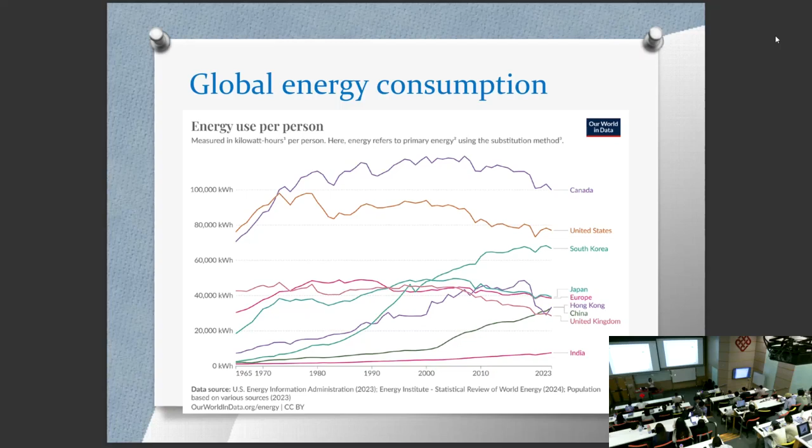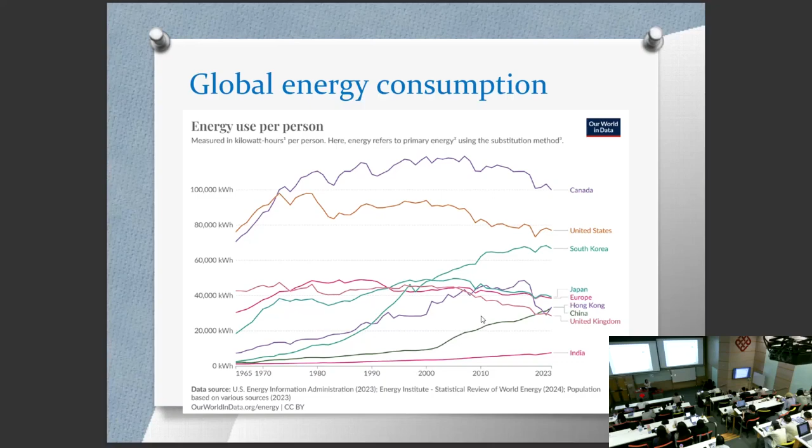And for developed countries, the energy use is dropping, like Canada and the United States. So although still a very high value, the trend is dropping. But for China and India, they are rising, because we have better living standards. Living standards in China are getting better and better, and therefore, with industrialization and urbanization, we are consuming more and more energy.

So global energy consumption is generally a function of three factors. First of all, number of consumers, like the population. The energy consumption in a country or in a region will first of all depend on the population. How many users, how many consumers are there?

And next would be the demand of services. So how much do we need from the energy? And it is dependent on many factors. For example, the economy, the economic growth. So if the living standard is higher and if our salary is higher, then probably we will also consume more energy. I remember back then when I was small, maybe in primary school.

So after school in the summer, maybe it's very hot and I want to switch on the air conditioner. And my mother would ask me to check the weather report, to check the temperature. So if it is higher than 30 degrees C, then I am allowed to switch on the air conditioner. But now, when I go back home, my sons have already switched on the air conditioner for the whole day, for the living room and also for the bedroom. So it's all about the living standard. It's different from decades ago.

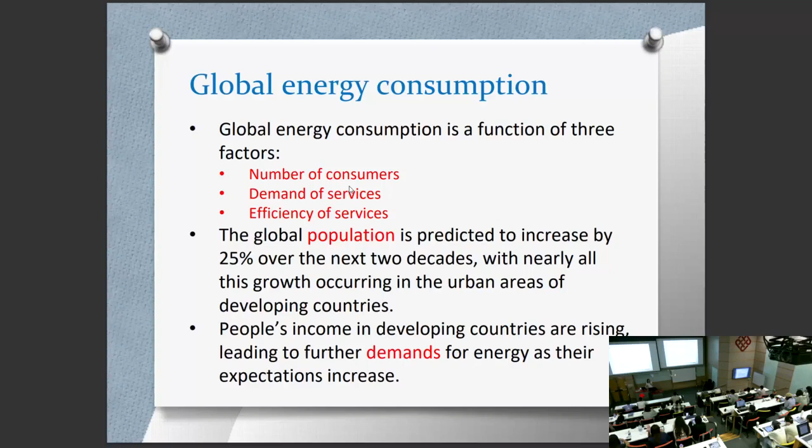And then around 110 years ago, we had the fluorescent tube. We didn't have LED general lighting yet. And the fluorescent tube is much more efficient than the incandescent. So once we had this new product in the market, people were very happy. They could save a lot on the electricity bill. But at the same time, if they could afford that amount of money, then they would install a lot of fluorescent tubes in the ceiling.

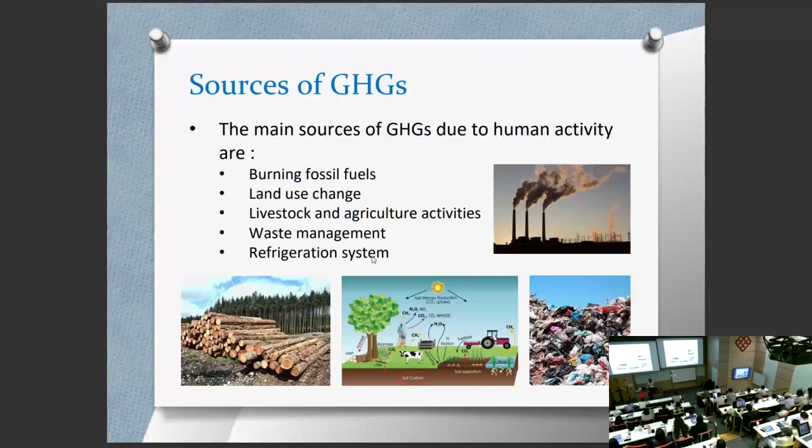And refrigeration systems. In the refrigeration system we use refrigerant, and most refrigerants are greenhouse gases. If these refrigerants leak to the atmosphere, they will contribute to global warming. So these are the greenhouse gases that we mentioned last time: carbon dioxide, nitrous oxide, and not to confuse nitrous oxide with nitrogen dioxide. Nitrous oxide is N2O, nitrogen dioxide is NO2, so they are different. Here we mean nitrous oxide, N2O.

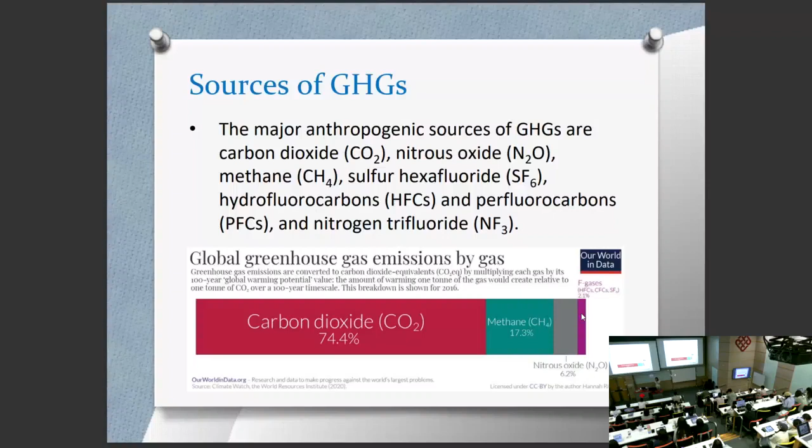And methane, SF6, hydrofluorocarbons, perfluorocarbons, which are commonly used for refrigeration, and NF3. These are the common greenhouse gases. For the radiation effect of all the common greenhouse gases, 74.4% is due to carbon dioxide, then methane, then nitrous oxide and other gases, so hydrofluoro- or perfluorocarbons would be here. Because carbon dioxide is still the predominant greenhouse gas in the atmosphere, we use the term carbon footprint.

The global carbon dioxide emissions is like this. So before the Industrial Revolution it is very, very low. But after that, we are consuming more and more and more. Just in a little bit more than 150 years, how many times? It used to be around just zero, but now 35 billion tons of carbon dioxide. So it's quite scary.

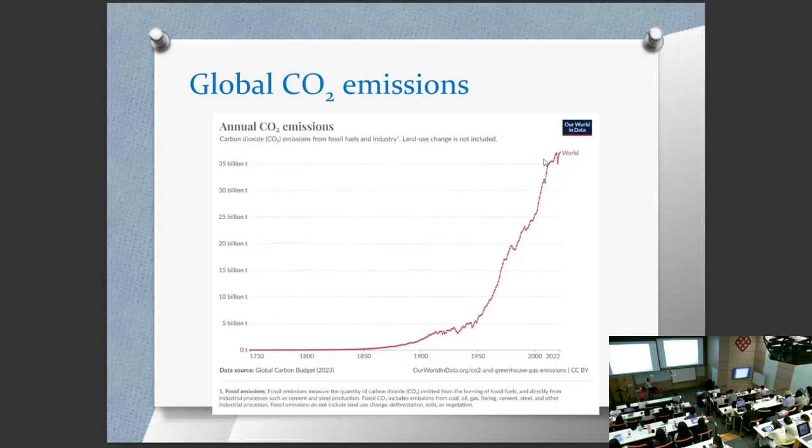Another factor is that China is what we call the world factory or the global factory, right? So many products are actually made in China. It means that we are making a lot of products here in China and export the products to other countries. And these products will be consumed in other countries, maybe in the US.

So it's like they are transferring those carbon emissions to China, because China is the factory. We produce a lot of products and therefore high carbon dioxide emissions. But actually these products are not consumed here in China, but elsewhere. So this factor also affects the carbon dioxide emissions and leads to the high emissions rate in China.

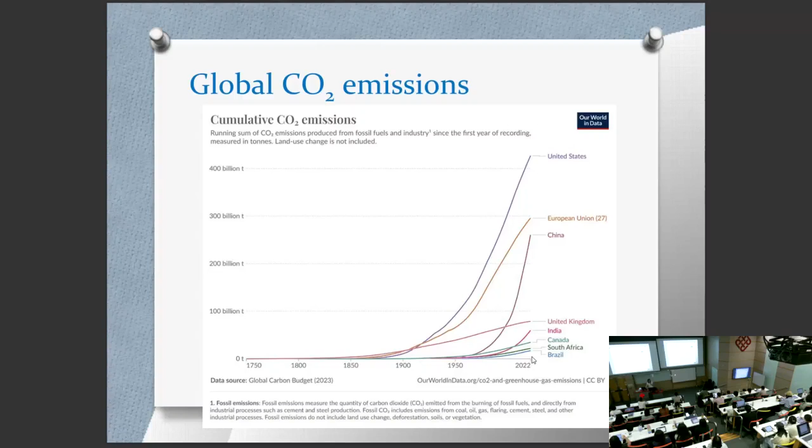And for China here, maybe some years later we would be catching up with the United States, which is not very good. That's why many countries, like the United Nations, are asking China to peak the carbon dioxide emissions in the coming years. It means they want China to reduce or start to stabilize their carbon dioxide emissions. And other countries, Canada, Brazil, India, these are developing countries, so their emissions are also getting higher and higher.

This is the global greenhouse gas emissions by sector, different types of industry. The largest one should be this one, manufacture and construction. So manufacture of products, any kind of products, and building. Transport, the consumption of electricity and maybe gas in residential buildings and commercial buildings, and agriculture, change of land use, waste, industrial process, and so on.

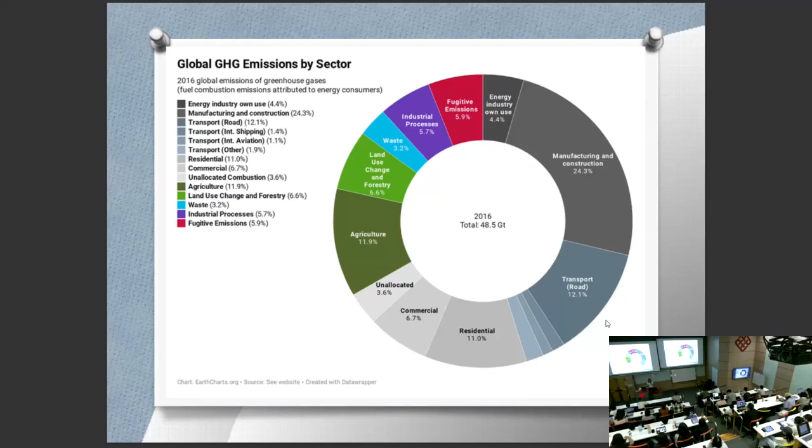So buildings use 30 to 40% of the global energy and contribute to around 1/3 of the global carbon dioxide emissions. So in total, in the whole world, the buildings, including the process of construction, the materials consumed in the construction process, the energy consumed in the construction process, and also during the operating stage, consumption by the air conditioning, the lighting, the lift, the escalator, all kinds of building services systems. So it is responsible for 1/3 of the global carbon dioxide emissions.

So you can see buildings are so much related with the carbon dioxide and other greenhouse gas emissions, and they are affecting one another. Our building industry is affecting the carbon emissions, and the degree of carbon emissions and also the carbon policy will also affect this industry, which will be explained very soon. So reducing energy consumption and reliance on fossil fuel in the building sector is therefore crucial to reduce the global greenhouse gas emissions and to mitigate the impact of climate change. Okay.

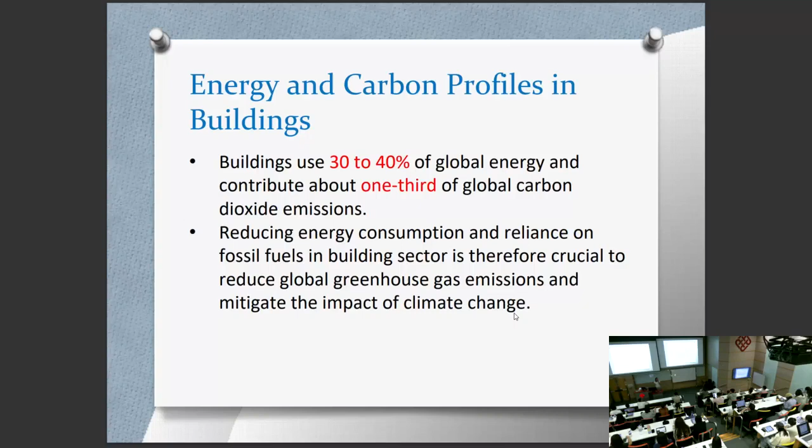So the Hong Kong government is promoting energy efficiency in the recent decades, like in the recent 20 years. And the EMSD also issues the energy efficiency label, like for the fridge, for the air conditioning, and so on. So all these would be with the objective of reducing the electricity consumption and therefore hopefully reducing the carbon dioxide emissions.

So buildings contribute 30% of the world's carbon dioxide emissions. The cost of carbon will impact on running costs, the price of construction materials, and the cost of traveling between buildings. Why is that? So the cost of carbon, one example is the carbon tax. We don't have the carbon tax here in Hong Kong currently, but you can imagine if in the future we need to pay the carbon tax for all kinds of products that we consume, then building would be much more expensive, electricity would be expensive.

And the transportation costs will also be expensive unless we switch to renewable energy for generating electricity. So carbon pricing will affect the building industry and also how we spend the money, our lifestyle. Buildings need to adapt to changing climates in the future, potentially higher temperatures and more extreme weather events. So the rising greenhouse gas emissions cause global warming and climate change.

So I mentioned the EMSD Building Energy Code earlier, right? It states some design criteria for the air conditioning system, and one of the design criteria is the outdoor air temperature. It used to be 33 degrees C, but now it is revised to 35 degrees C because of global warming. So climate change, like global warming, is affecting our building design, and the more and more frequent thunderstorms and heavy rain will also affect the building design.

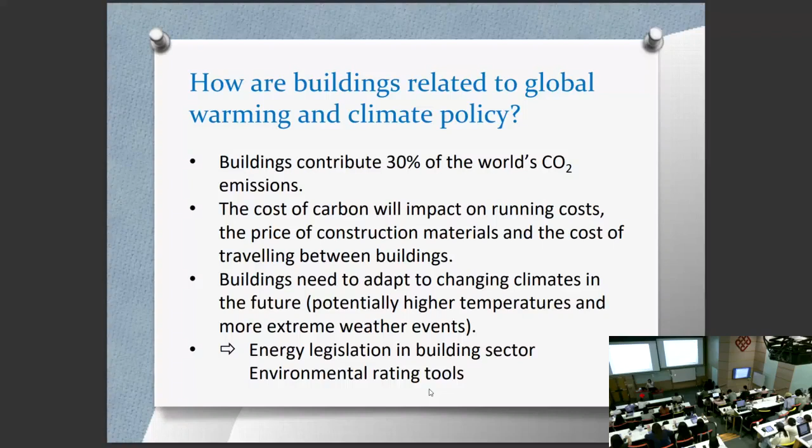Energy legislation in the building sector. Environmental rating tools. So the building legislation is like what I mentioned, the EMSD Building Energy Code, and the environmental rating tools like BEAM Plus, and also LEED, L-E-E-D, which is similar green labeling for buildings. Okay, so now we will talk about life cycle assessment and embodied carbon. Life cycle assessment. So what does it mean by life cycle?

Carbon footprint is typically used to indicate the extent of greenhouse gas emissions resulting from a person's or an organization's activities. So like the carbon footprint of a Hong Kong citizen is around 4.5 tons of carbon dioxide. So this is the carbon footprint for one person.

And we may also use the carbon footprint to state the carbon dioxide emissions due to an activity, maybe a BBQ by a company, and maybe for one building, for one region. So this is the carbon footprint.

And carbon footprint assessment is the measurement of greenhouse gas emitting processes, their origins, their composition, and amount. So origins would be like we have different greenhouse gas emission sources, maybe due to the leakage of refrigerant, or maybe due to the consumption of electricity. So these are the origins.

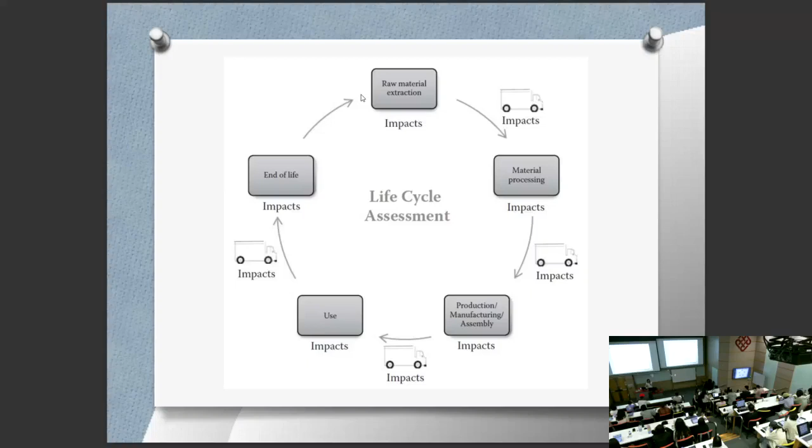So LCA, Life Cycle Assessment, provides a comprehensive approach to understanding the environmental impacts of a product. So maybe a water bottle, maybe a straw, maybe a building. The carbon footprint analysis is only a measure of the climate change impact, global warming implications. And LCA is useful for analyzing many different kinds of environmental impacts, not just global warming. LCA provides an important methodological framework for carbon footprint assessment. So it provides a framework for us to compare.

Usually the life cycle assessment is for comparison. Like maybe we have two designs for a water bottle, and we carried out the life cycle assessment, and we want to find out which design will have lower environmental impacts. So LCA is usually for comparison instead of finding the absolute amount of environmental impacts. Because in the life cycle assessment, we need to make a lot of assumptions, and sometimes there are so many uncertainties. So the absolute answer may not be too meaningful.

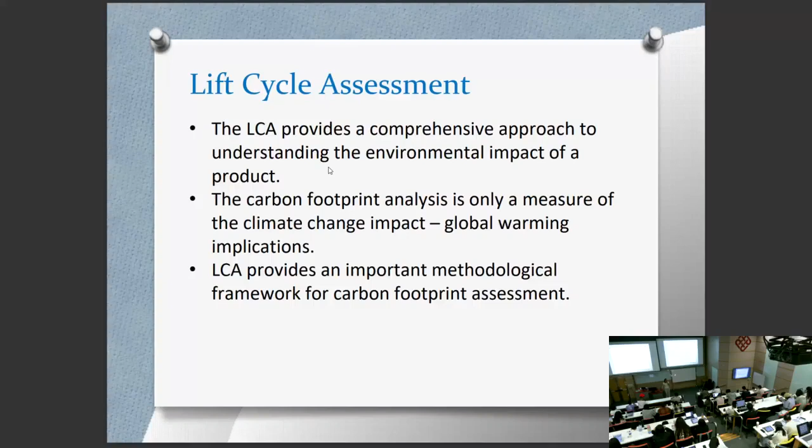But if we make the same assumption and then compare two different products, then we have a conclusion. You see what I mean? So there are too many uncertainties in the LCA such that we need to make assumptions. But for similar designs, similar products, we make the same assumption so that we can do the comparison fairly.

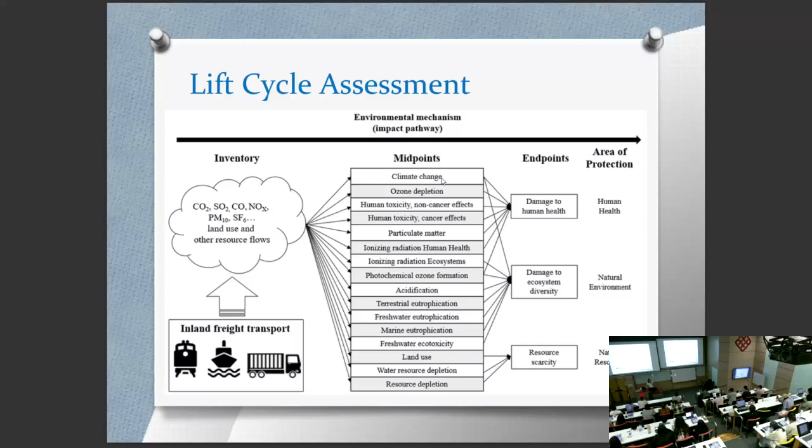And for different stages in the life cycle of a product, like a water bottle, we have different inputs and outputs. And these may lead to climate change, may lead to the release of PM 2.5, polluting the air or affecting human health, or leading to water resource depletion or resource depletion. So for any human activities, for a product, we can use the life cycle assessment to study its environmental impact. And under the category climate change, we use carbon dioxide emissions to assess the global warming effects.

So people inside buildings use energy. Constructing and refurbishing buildings requires energy. During the construction process, we consume energy and we consume resources. And these resources also rely on consuming more energy and resources to produce that kind of product. Commuting to and from the buildings consumes energy, like traveling. And not just the construction of the building on day one, but also including the refurbishing and renovation.

So you can think of maybe you move to a new house. Probably you want to do some refurbishment. Maybe do some painting, and then buy new furniture, new curtains. So this kind of refurbishment and renovation will also consume energy and contribute to carbon dioxide emissions. So construction, refurbishment, renovation, and travel. All these are related to buildings. And these three categories also contribute to greenhouse gas emissions.

And therefore, we have three kinds of carbon footprint generally. We have operating carbon, embodied carbon, and transport carbon. So the three added together, the overall, would be the whole carbon footprint of a building. So first of all, operating carbon. What is the operating carbon?

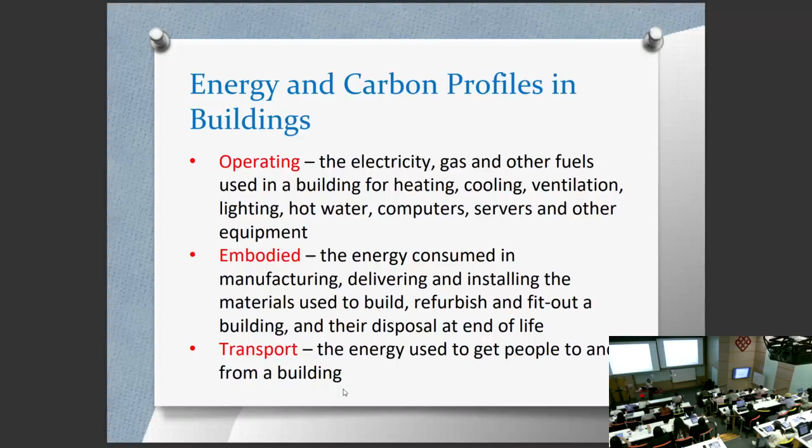So if it is about electricity consumption, then the fuel mix of the electricity generation will highly affect how much carbon will be produced. So whether you are using renewable energy, nuclear power, or burning fossil fuel will affect very much the operating carbon. Okay, just like what I mentioned earlier.

So I am buying electricity from CLP, and CLP imports electricity from Daya Bay. So probably their emissions will be lower. Okay, so the fuel mix of the electricity will affect very much the operating carbon.

Okay, and there will also be distribution loss. Every conductor will have resistance, so it means that along the transmission cable, there will be certain power loss. And this power loss should also contribute to the operating carbon. Okay?

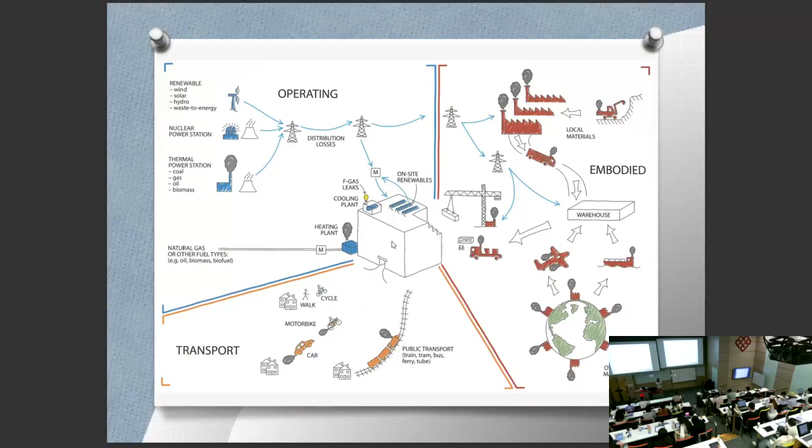So before the break, we have learned different kinds of carbon related to a building: the embodied carbon, the operating carbon, and the transport carbon. And for today, we will focus on the embodied carbon. Energy and carbon profiles in building.

So for any kind of carbon, the unit would be carbon dioxide equivalent. If you remember, last week in our first lecture, we explained the concept of global warming potential. There are different kinds of greenhouse gases, carbon dioxide, methane, nitrous oxide, and they have different radiative forcing, meaning their heat trapping abilities are different. So in order to compare them fairly, we convert the quantity of methane or nitrous oxide into carbon dioxide equivalent by using the global warming potential.

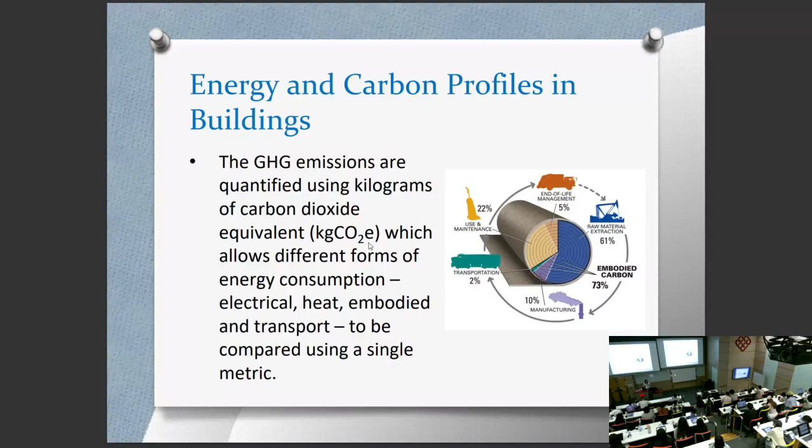So greenhouse gas emissions are quantified using kilograms or tons of carbon dioxide equivalent, which allows different forms of energy consumption, electrical, heat, embodied and transport, to be compared using a single metric. So for carbon footprint, we use the unit ton or kg CO2e. That's why you see the E here. The E represents equivalent, so it has already incorporated the global warming potential.

Every material or product used in a building has embodied carbon, unless it's something from nature. But if it is a man-made product, then it will have certain embodied carbon. Embodied carbon of a building material refers to the greenhouse gas emissions arising from its manufacturing, transportation, storage, installation, maintenance, and disposal at the end of life. So every stage in the life cycle of that product. For embodied carbon, we use the life cycle concept to do the assessment.

So from material extraction, processing, manufacturing, transportation to the factory and then to the warehouse, installation, maintenance, maybe every 10 years we need maintenance, and finally, when it is not usable, we dispose of it. So how you dispose of it, whether you throw it in the landfill or you recycle, all these will affect the embodied carbon.

And it involves complex computation in the large supply chain involved in construction, fit-out, maintenance, refurbishment, and eventual demolition of the buildings. So, like I am making something, maybe handcraft, using some fabric to make a dress, for example, and I want to estimate the carbon footprint of making that dress. But I just bought the fabric from Sham Shui Po. So how can I get the data?

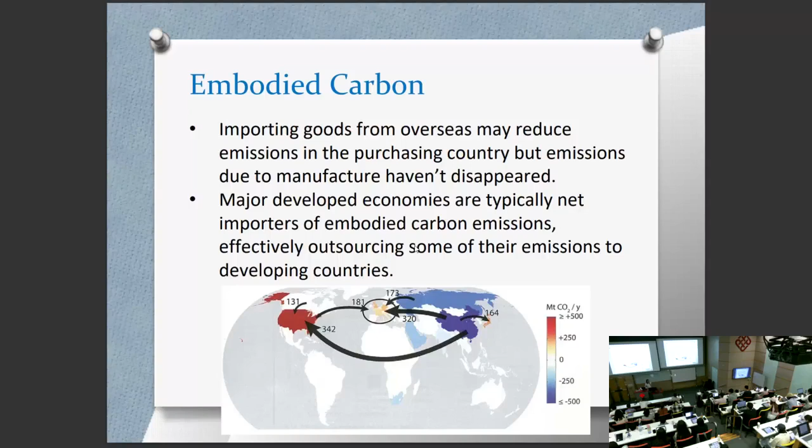Major developed economies are typically net importers of embodied carbon emissions. If the product is made in China, the carbon emissions are actually released in China, but they import the product, so it means they import the carbon emissions also. So these are different, important concepts.

When we describe the embodied carbon, the boundaries are very important. The boundaries mean that in the whole life cycle, we may estimate the embodied carbon from cradle all the way up to when the product is manufactured and sent to the warehouse, or from cradle to the site, that is, all the way from material extraction, manufacturing, transportation to the warehouse, and then to the construction site, or the whole life cycle, from cradle to grave.

So different boundaries are necessary, because if I am the manufacturer of the water bottle, or maybe some furniture, or maybe some brick for construction, I cannot control the construction process, right? I can control only up to when the bricks are sent to the warehouse or some distribution center.

But if you are the building designer, you want to compare the building design across several options, and you may have different construction designs, different approaches, so that will affect how you utilize the brick and the energy consumption during the process. So then the embodied carbon may be up to the construction site, or maybe even cradle to grave, the whole life cycle. So when we do the embodied carbon assessment, we need to set the boundary, and there are several boundaries that we may use: cradle to gate, cradle to site, and cradle to grave.

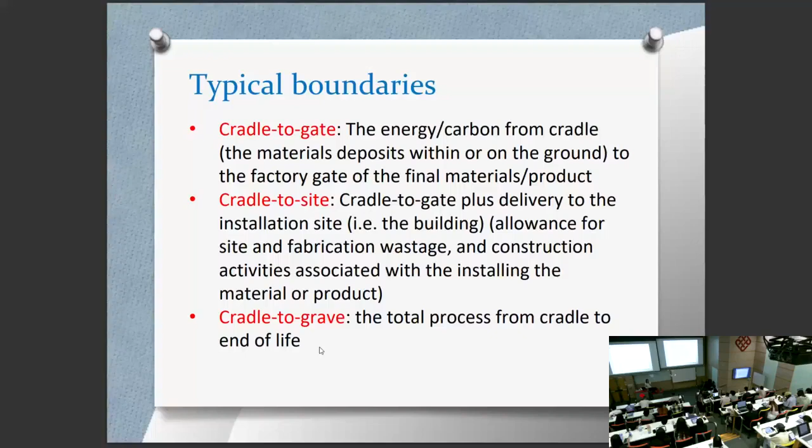And finally, cradle to grave is everything associated in the life cycle of that product, from cradle to end of life. So here we have cradle to grave. From cradle, we extract the raw materials, then some industrial process, some manufacturing process, transportation to the warehouse, which is the distribution center.

So from cradle up to here, it is cradle to gate. If I am the manufacturer, probably I will have the capacity to estimate the cradle to gate embodied carbon, right? And when you buy the product from the warehouse and use a truck to transport the product to the construction site, you will order some more to allow some wastage, and in the process you may have to consume certain electricity. So these processes will also result in carbon emissions.

So up to this point, after finishing the construction process utilizing the product, it is cradle to site embodied carbon. And the product, like this brick wall, will be in operation. During this phase, there should not be any embodied carbon because it's the operation stage, unless this product needs some renovation or refurbishment. Maybe every now and then you may need to renovate or refurbish the brick wall. Then it will also include some embodied carbon during the operating phase.

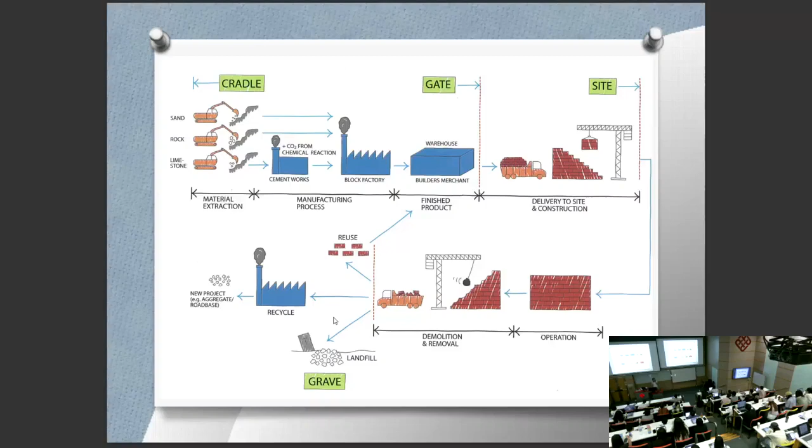And at the end of the day, when that product is thrown away, demolished, then certain carbon will also be emitted. And it depends on the disposal process, whether you throw it into the landfill or recycle the product. So up to this point would be cradle to grave. All right. So 3 different boundaries for the assessment of embodied carbon.

So calculating the embodied carbon of initial construction. Initial construction is the construction of that building on day 1, not the renovation every 10 years, not the refurbishment of the interior. So an embodied carbon assessment is basically a bill of quantities using carbon rates instead of cost rates. For a building project, like in the tender process, you have a long table summarizing all the materials to be consumed. And instead of money, here we use the carbon emissions as the unit rate, so as to estimate the initial embodied carbon.

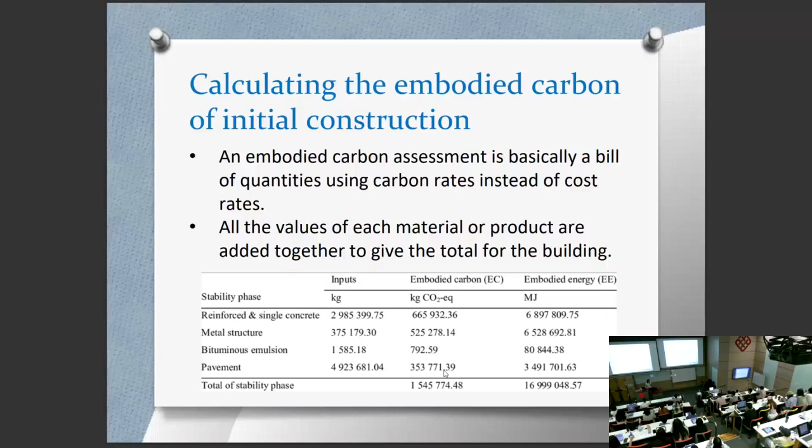So all the values of each material or product are added together to give the total for the building. And once again, we will be using the carbon equivalent as the unit, kg or ton of carbon equivalent. So here, maybe reinforced concrete, metal, and some others. You have the weight, and you have the emission factors, maybe certain carbon equivalent per kg. Then you can calculate the embodied carbon of that material, and we add them together to find the total. Of course, this is a simplified table.

So if this emission factor is based on the manufacturer data, then probably this is the cradle to gate embodied carbon, right? Up to the warehouse. This is what the manufacturer can control. And if you add to the cradle to gate embodied carbon the waste, allowing some wastage in the material, the transportation from the warehouse to the construction site, and also the site activities, then you have the cradle to site embodied carbon. All right?

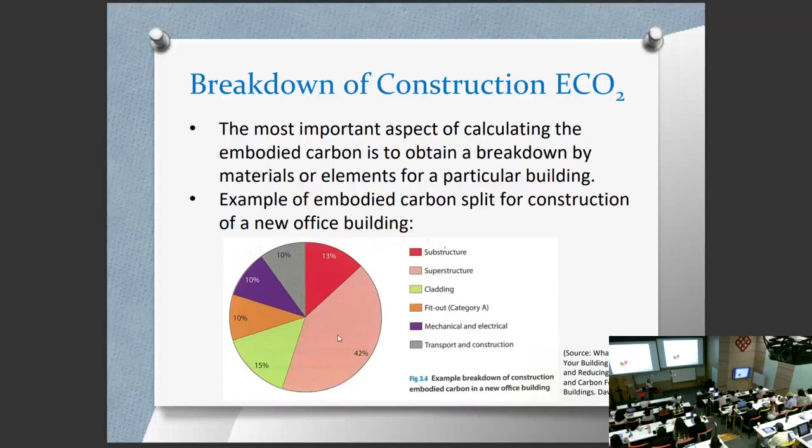Why is that? Because in order to manufacture timber, you need to grow a tree, right? And during the years of growing, the tree will absorb carbon dioxide. So it acts like a sink of carbon dioxide. So for the life cycle of the product timber, some duration of the life cycle will absorb carbon dioxide, resulting in a negative embodied carbon.

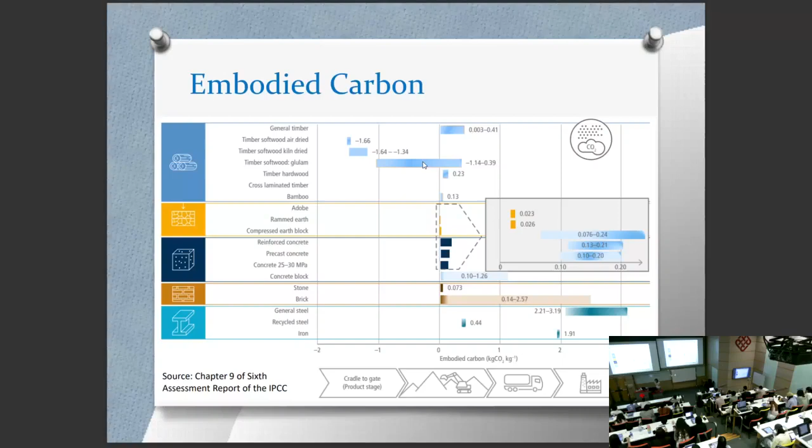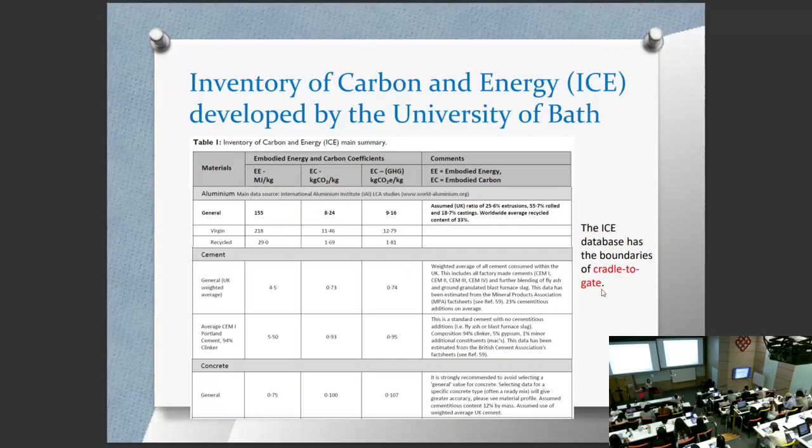It should be noted that the material or products with the lowest cradle to gate embodied carbon may not necessarily have the lowest greenhouse gas emissions over the life of the building. This is because materials and products have different properties, durability and recyclability. For example, maybe you want to compare a concrete construction and a steel construction. Steel is a kind of metal, so if you refer to the previous table, you will find that the embodied carbon per kg of steel would be larger than that of concrete. Very probable. But they have different density, right?

So if you are building a house with a metal or steel structure, probably you will use less in terms of weight than concrete. So you cannot just compare the emission factor. And also for steel, when you demolish the building, you can maybe reuse or recycle the steel. So it depends on how you utilize the material and the disposal, how you treat the waste. And durability, whether some materials are more durable or need frequent maintenance. All these will affect the embodied carbon over the whole lifetime of the material.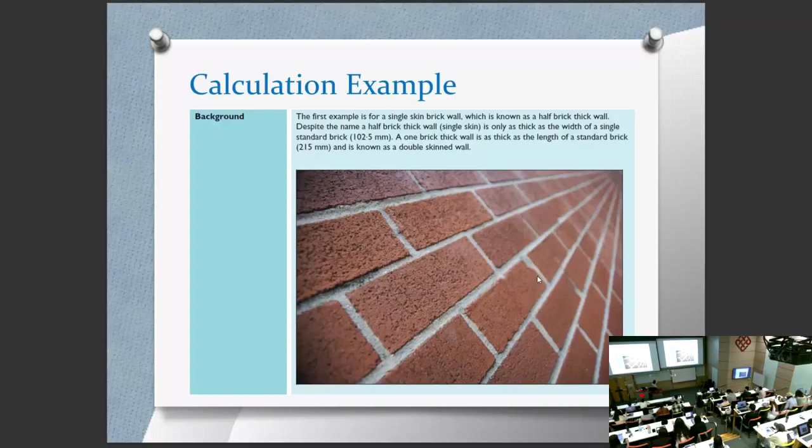Here is an example, and it involves some calculation. So, a single skin brick wall, blah, blah, blah. It's just some explanation. It's just that we are building a wall, like this. This is the brick, and we are building the wall simply like this. And single skin or double skin is because a double skin wall would be something like, okay, very bad drawing.

We can build a brick wall like this. You can see that for this brick wall, the thickness will be larger than this. This one is only a single layer, right? This one has larger thickness, so it is called the double skin wall, and this one is the single skin brick wall.

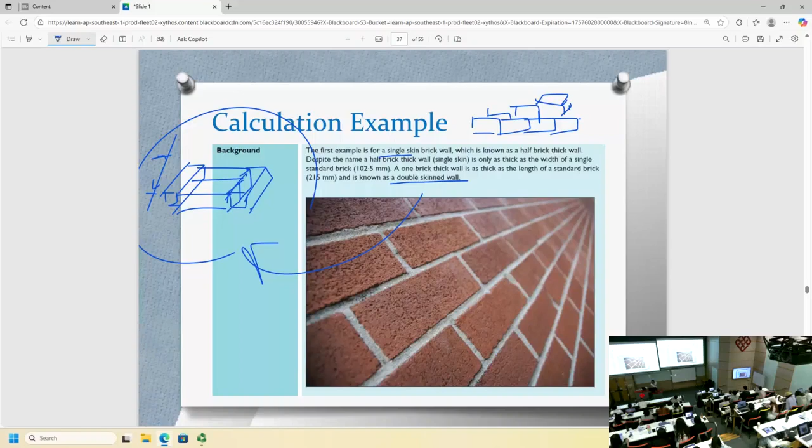Nothing special. Then we want to calculate the cradle to site embodied carbon of a single brick thick wall per square meter. So here we have 1 meter by 1 meter of brick wall, single brick thickness.

Okay, so something like this. And it is given the dimensions of the brick is 215 mm in length and the width 102.5. So if the brick is like this, the length is 215 mm, the width is 102.5, and the height is 65 mm. So this is the UK standard brick.

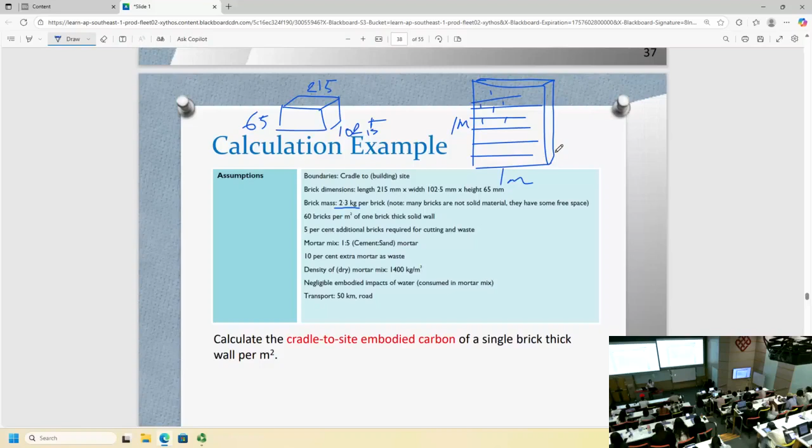And we have the mass. Okay, the weight of one brick is 2.3 kg. And in order to build a 1 meter by 1 meter brick wall, we need 60 number of bricks. Then we can construct this brick wall. And apart from brick, we also need to use mortar. So for the mortar, we have the density. The density of the mortar is given to be 1,400 kg per cubic meter.

And remember, to calculate the cradle to site embodied carbon, we need to include the wastage. We need to allow some bricks and mortar being wasted. And the wastage factor is 5% for the brick and 10% for the mortar. Apart from the waste, we also need to include the transportation, the carbon emissions due to transportation from the warehouse to the construction site. So include the transport.

So we have the data for us to calculate the quantity of bricks that we need and the quantities of the mortar that we need. How about the emission factor? So we refer to the next slide. The emission factors for embodied carbon would be 0.55 kg carbon dioxide equivalent for each number of brick. And how many do we need? We need 60 number of brick, but we need to allow 5% of wastage. So we need to multiply 1.05 in order to include the wastage factor. And multiply by 0.55 would be the part of the carbon emissions due to the manufacturing of brick.

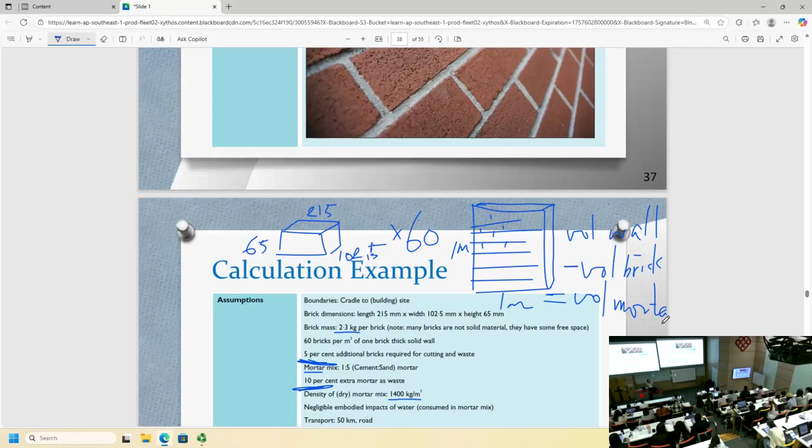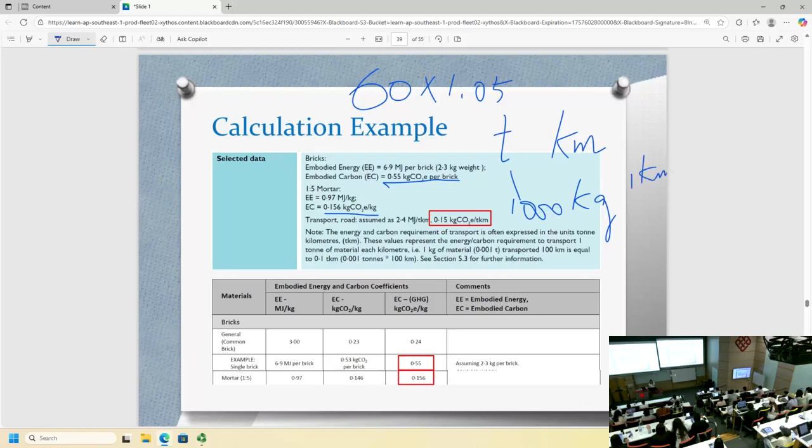So we have the volume and we have the density. So we can calculate the weight of the mortar and multiply by the wastage factor and the emission factor. Then we have the carbon emissions. And finally, the last factor is due to the transport. The transport emission factor is 0.15 kg carbon dioxide equivalent per ton km. So it means that for every 1 ton, which equals 1,000 kg, of goods to be transported, and for every 1 km of transportation distance, the emissions will be 0.15 kg of carbon dioxide equivalent.

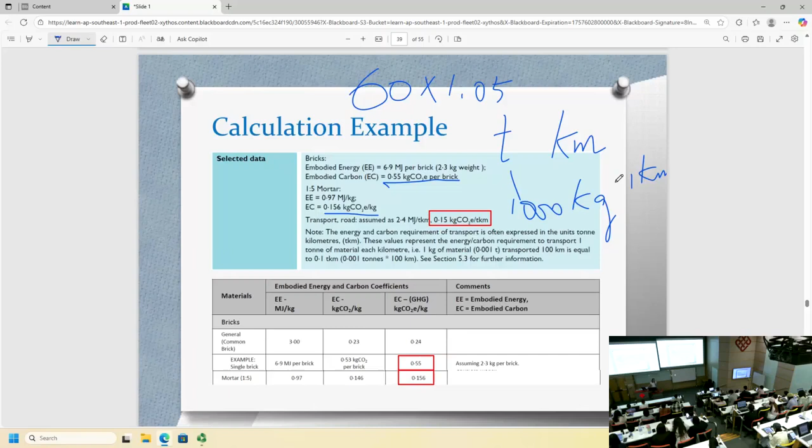And this is only a general value. The emissions will depend on the type of truck, the type of fuel, whether you use diesel oil or biodiesel oil. So all these will affect the emission factor for transport. So in order to find out the transport carbon, we need to know the total weight of all the bricks, including the wastage factor, and the total amount of mortar that we need. And the transportation distance is given, 50 km. 50 km is the traveling distance.

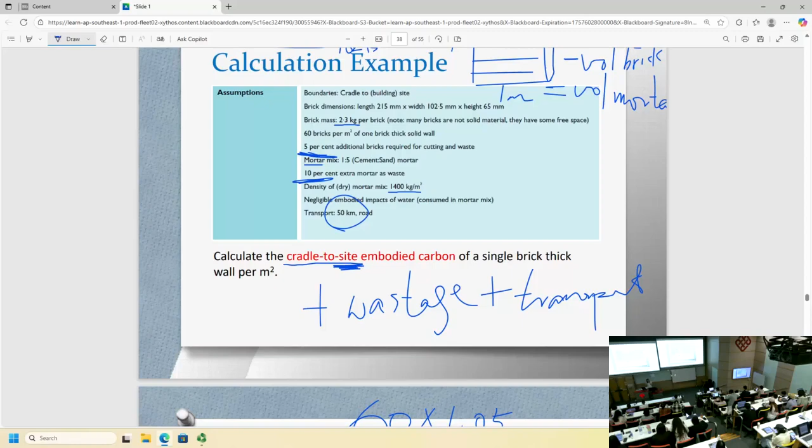So in the calculations, here we are calculating the area. So if this is the 1 meter by 1 meter, and we have the brick covering 1 meter by 1 meter. So we can calculate the area occupied by the brick. So 1 meter by 1 meter minus the area occupied by the brick would be the area occupied by the mortar. So 1 meter by 1 meter, and the length and the height of one brick, and within 1 meter by 1 meter area, we need 60 number of bricks.

So this is the area, multiplied by the thickness of the wall, then we have the total volume, and the density. So volume multiplied by the density, and we have the weight. So the total weight to be transported would be the weight of the mortar, including the wastage factor, and the weight of one brick, times 60, and the wastage factor. So this is the total weight. So 170 kg would be 0.1704 ton. Okay, so very straightforward calculation.

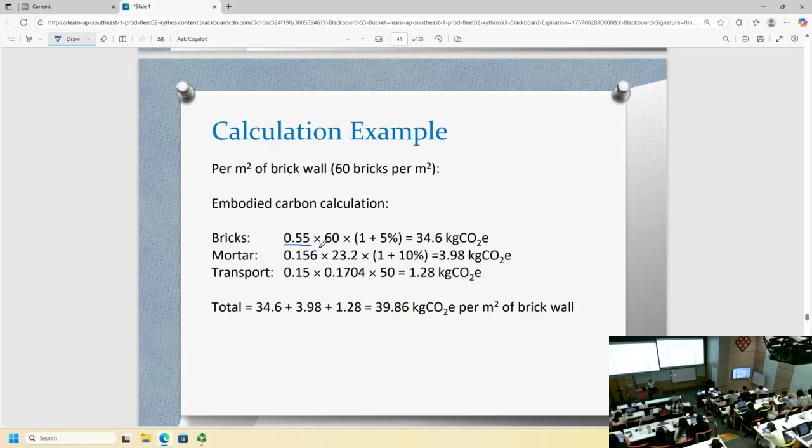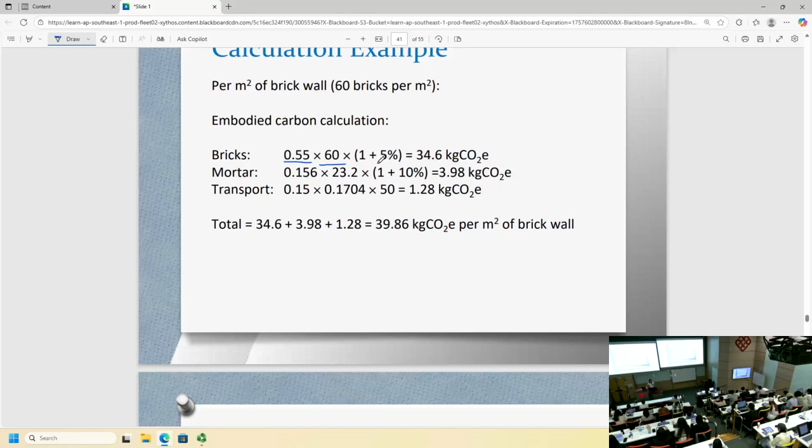And now we can calculate the embodied carbon. So for the brick, we have the emission factors, and we need 60 bricks, and the emission factor is per brick, so 0.55 kg CO2 equivalent per brick. So we only need to multiply by the number of bricks, including the wastage factor. And then also the emission factor, but this time this emission factor is per kg. So we need to calculate the overall weight, which is this, and then multiply by the wastage factor, and we have the carbon emissions.

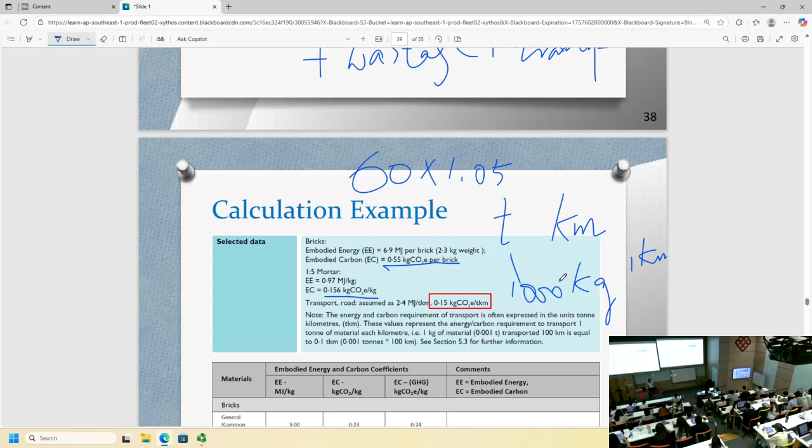And then the transport. This is the emission factor, 0.15 kg carbon dioxide equivalent per ton km. So we need to multiply 0.15 with the total weight, how many tons of goods to be transported, and the total transportation distance. So the total weight is this value. We multiply by the total weight, and the distance is given to be 50 km. And adding all these three together would be the embodied carbon, cradle to gate. All right.

So we know that the calculations of embodied carbon for a building involve a lot of data, some recommendations from the guidelines, some assumptions. According to the book called What Colour is Your Building? Measuring and Reducing Energy and Carbon Footprint of Buildings, which is a research study in the UK, the author has collected the initial construction embodied carbon of different buildings, and it is found that the average is around 700 kg carbon dioxide equivalent per square meter. And this area is the gross internal floor area.

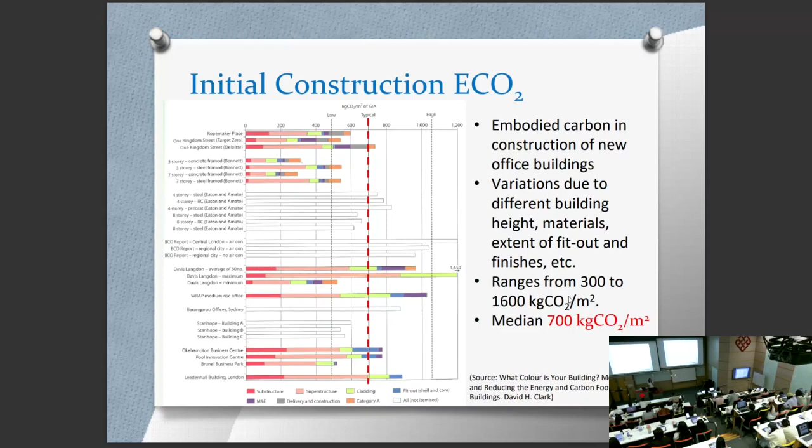And it actually has a large variation. The embodied carbon can range from 300 to 1,600 kg carbon dioxide per square meter of gross internal floor area. And it makes sense, there must be a large variation, depending on the material you use, whether timber or concrete or steel structure, and then the interior refurbishment, and the construction process. All these will affect the initial construction embodied carbon.

While the structure of a typical building may last 50 or 60 years, many components, such as the mechanical and electrical plant and the interior furnishing, will be replaced or refurbished, often more than once within the time frame. Maybe every 20 years we need to replace the air conditioning plant, or refurbish the carpet every 5 years. Refurbishment and fitting out have to be done when a new tenancy starts, especially for commercial buildings like offices or retail shops in shopping centers. If a new tenant moves in, they will probably do the refurbishment and renovation.

So the whole life embodied carbon of a building includes the initial embodied carbon, the embodied carbon due to refurbishment and fitting out, as well as the end-of-life embodied carbon: when you demolish the building, how you treat the waste, dispose in landfill or recycle. So first, the initial embodied carbon, how much carbon is released when you construct the building. Then adding the refurbishment and fit-out carbon, because every few years you may need to refurbish. And finally, adding the end-of-life embodied carbon. These three together are the overall embodied carbon.

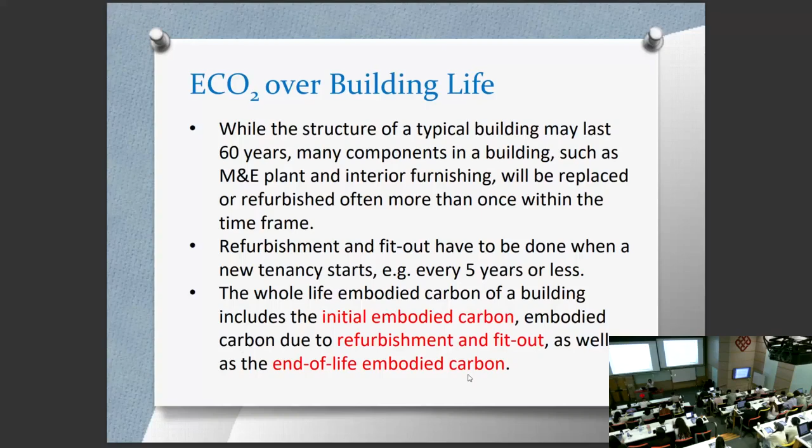Embodied carbon due to tenant fit out. Based on the same reference book, What Colour is Your Building?, the carbon due to the fit out would be between 100 to 200 kg carbon dioxide equivalent for every square meter of gross internal floor area. If we assume the fitting out happens every 10 years, it could represent a significant portion of the whole life embodied carbon of a typical office building.

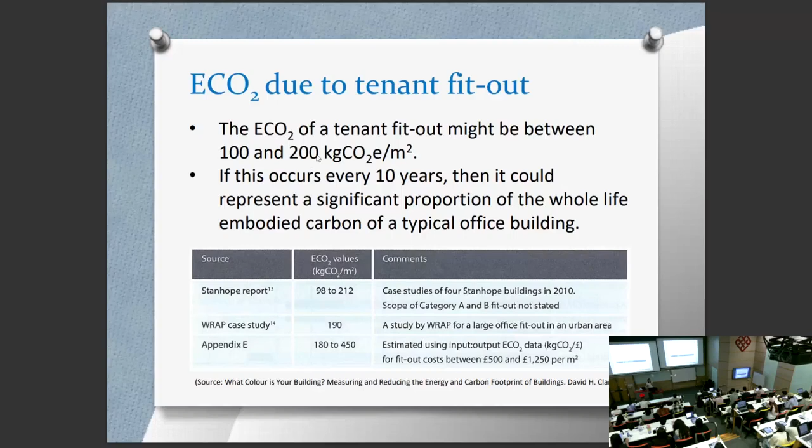Remember, according to the same book, the average initial embodied carbon is around 700, and for the fit out, 100 to 200 every time. In the whole life cycle, which may last 50 or 60 years, we may need to do at least 5 fit-outs. Then it could be even more than the initial carbon.

Okay, end of life embodied carbon. So what happens to the materials at the end of life is a complex issue, because the building is still there. I don't know what would happen 10 years, 20 years later. So various studies based on current demolition practices suggest that site activities and waste transportation and disposal account for between 3% to 5% of the total embodied carbon. This is only based on some previous projects of demolishing buildings. So it will be around 3% to 5% of the total embodied carbon.

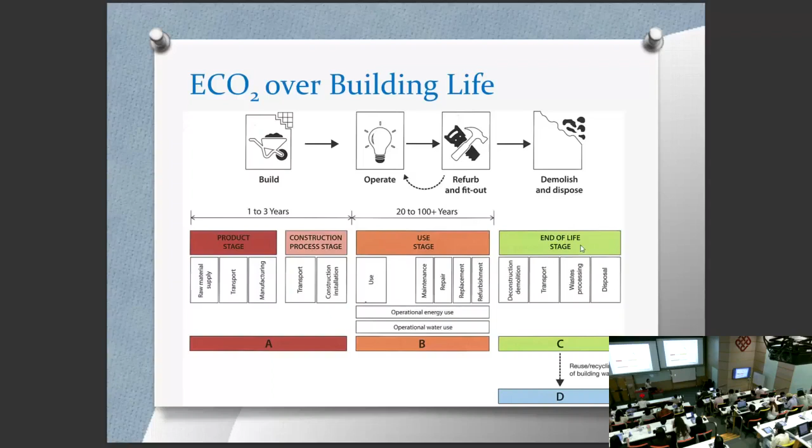So this table lists out different kinds of embodied carbon. First of all is the initial embodied carbon. Next, in the usage phase, you have the refurbishment and the fitting out, and these are the fit-out and refurbishment embodied carbon. And at the end of the lifetime of the building, you have to demolish the building, spend some energy, transport the waste, maybe to the landfill, or maybe for recycling. So these are the end of life embodied carbon. Adding up together, you have the total embodied carbon.

So let's try to compare these two. Which building has lower whole life embodied carbon? Steel structure building or timber structure building? Maybe from our intuition, from our first guess, timber structures have negative embodied carbon, right? Then it makes sense that the timber structure building should have a lower whole life embodied carbon. But we also need to consider other factors like durability. A steel structure is probably more durable and needs lower maintenance, so lower maintenance carbon. And when it is disposed at the end of its lifetime, steel can be reused or recycled.

And for a timber structure, yes, it is true that the timber may have a very low embodied carbon. But how about the construction process? Maybe we have to consume more energy, more electricity for construction, and the timber may not be as durable as the steel structure. And at the end of the day, when we throw away the timber, how will you treat it? If you throw the timber to the landfill, when it decomposes, the carbon dioxide will be released. Or you can capture the gas released from the timber, maybe for generating electricity. So all these decisions will affect the whole life embodied carbon. You cannot simply compare these two without further information.

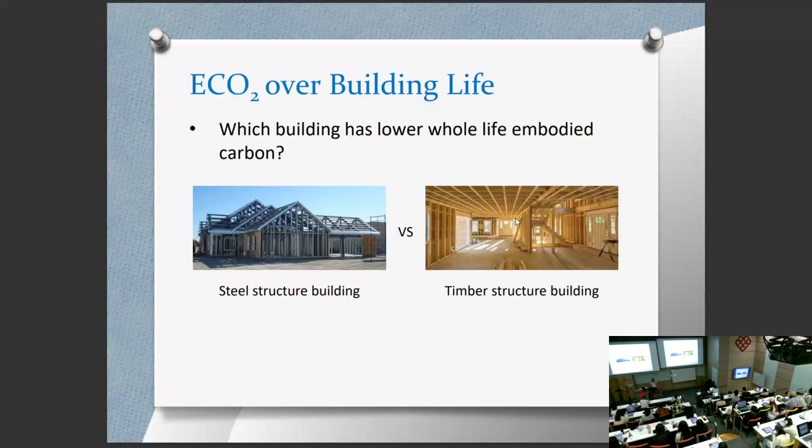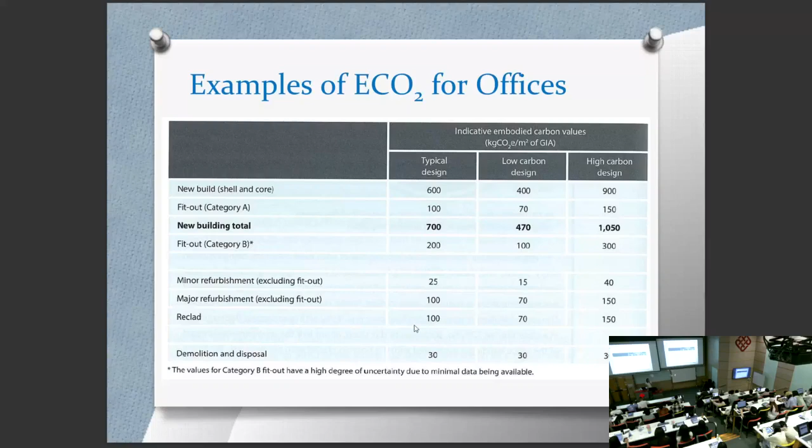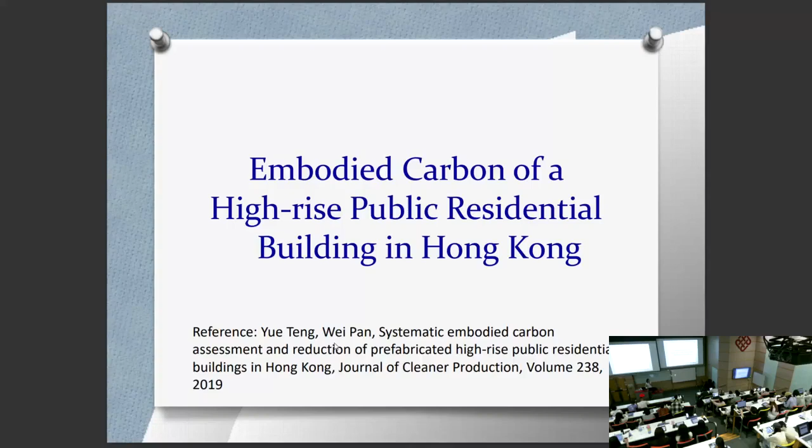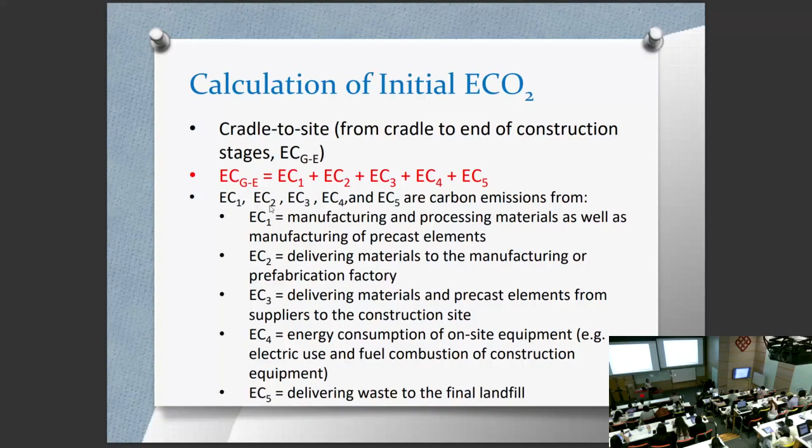is like this. Based on the research project, they calculate the cradle to site embodied carbon, which includes the embodied carbon for manufacturing and processing the material, delivering the precast elements from the prefabrication factory to the construction site, and the energy consumption of on-site equipment, that is, the construction process. And lastly, throwing away the construction waste to the landfill. All these added up give the cradle to site embodied carbon.

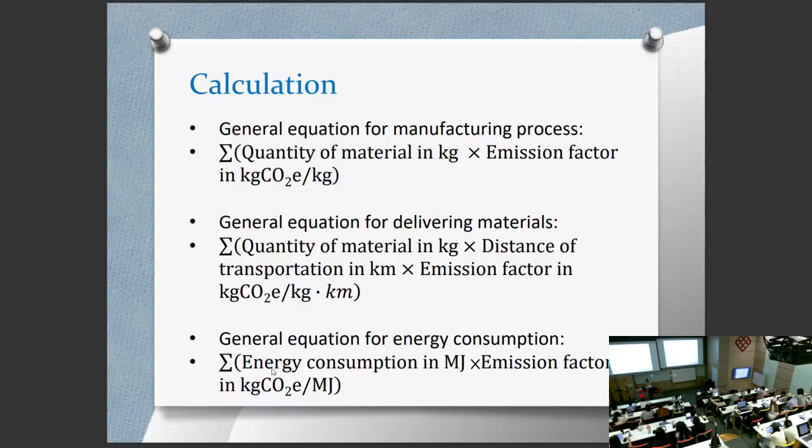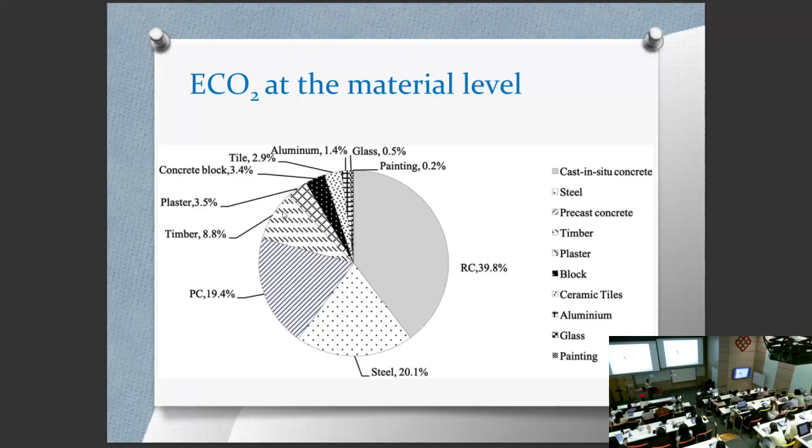And the result: the concrete, on-site concrete, manufacturing and the construction, and the precast concrete, the steel, they already constitute most of the embodied carbon. And next would be the timber, maybe for the cladding of the reinforced concrete, and then plaster, and so on.

Okay, so just some more examples for your reference. We have some examples from the book, which are for UK buildings, and this is another example for buildings in Hong Kong.

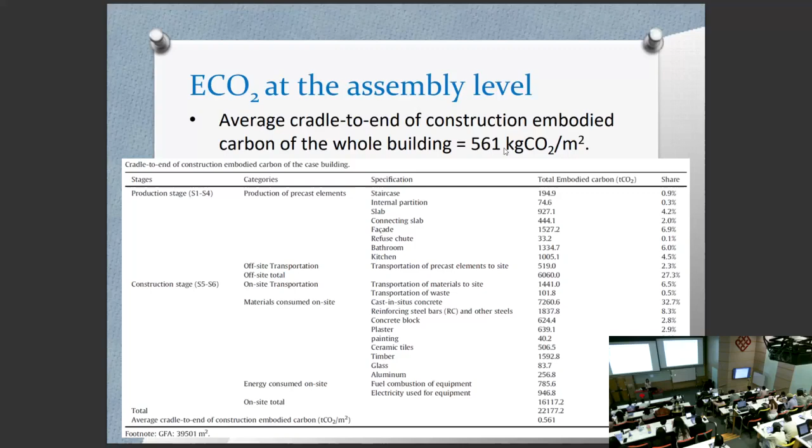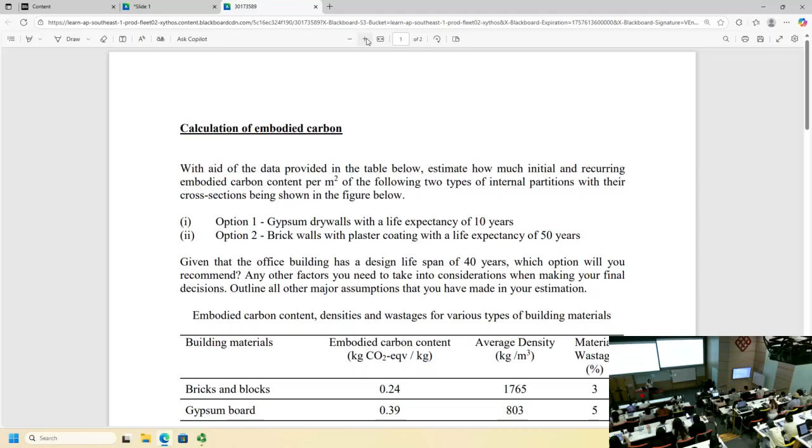Okay, so lastly, I would like to discuss with you the tutorial. I will finish it very quickly. This is something similar to the example that we have studied earlier. With the aid of the data provided in the table below, estimate how much initial and recurring embodied carbon per square meter of the following two types of internal partitions, with their cross-section being shown in the figure.

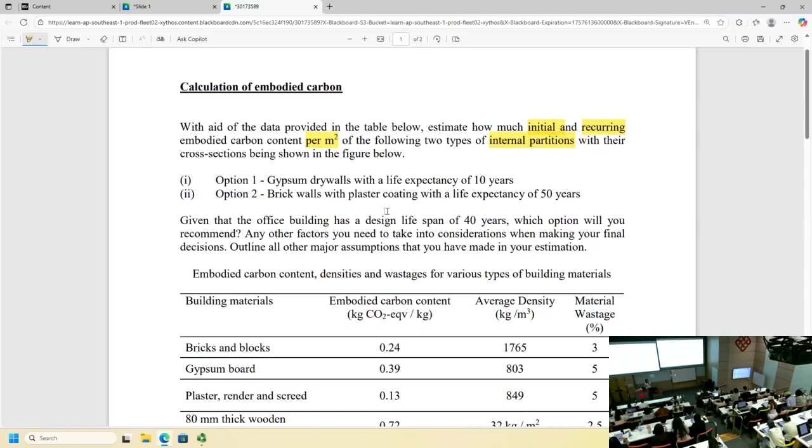So we have two kinds of internal partitions. Either you use gypsum drywall, or the brick wall with plaster coating. The composition of the walls is explained in the figure. Option 1, the gypsum drywalls with a life expectancy of 10 years. So this is a cheap drywall, and it will probably last for 10 years only.

So if you choose this kind of partition wall, you have to replace the drywall every 10 years. And option 2, brick walls with plaster coating, has a life expectancy of 50 years, a much longer time. Given the office building has a design lifespan of 40 years, we assume the lifetime of the building is 40 years.

So if you are using the drywall, you have to replace the drywall 4 times. If you are using the brick wall, you don't need to replace any, because its lifetime is longer than that of the building. So after calculating the embodied carbon, you have to determine which option you will recommend, any other factors you need to take into consideration when making your final decision, and outline all the major assumptions that you have made in your estimation.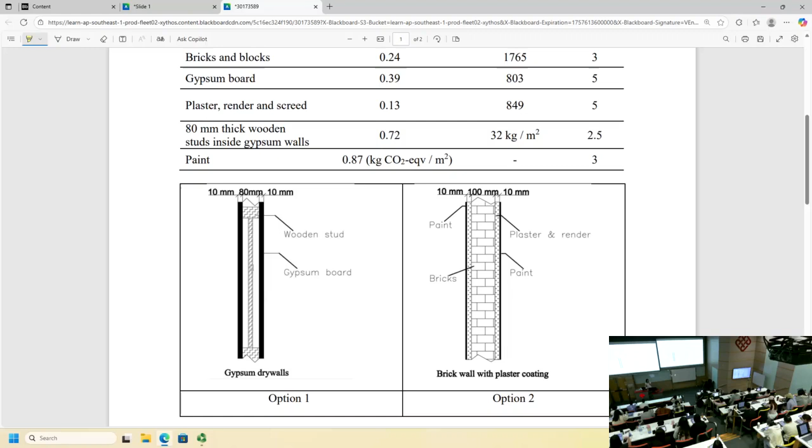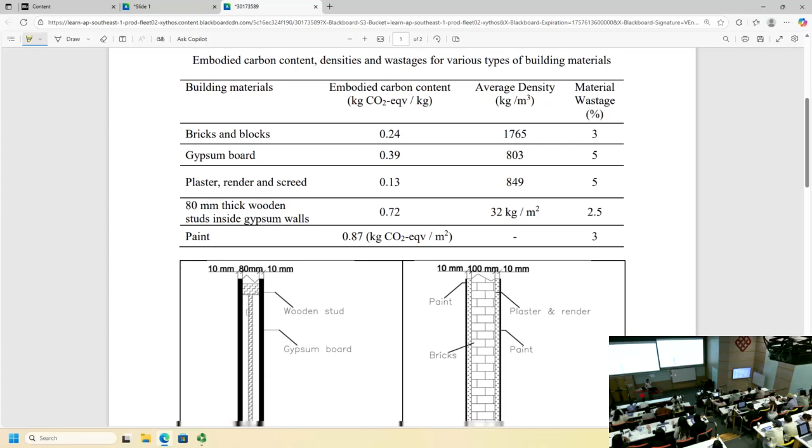And for the gypsum board, also per kg, and you have the density. And the plaster, render, and screed on the brick wall, you have the emission factor and density. And the wooden studs, the structure for installing the drywalls, you are given not really the density, but something like it: 32 kg of wooden studs inside the gypsum board per square meter of wall area.

And on the 2 sides of this brick wall, you also need to apply the paint. And the paint emission factor is per square meter of the wall.

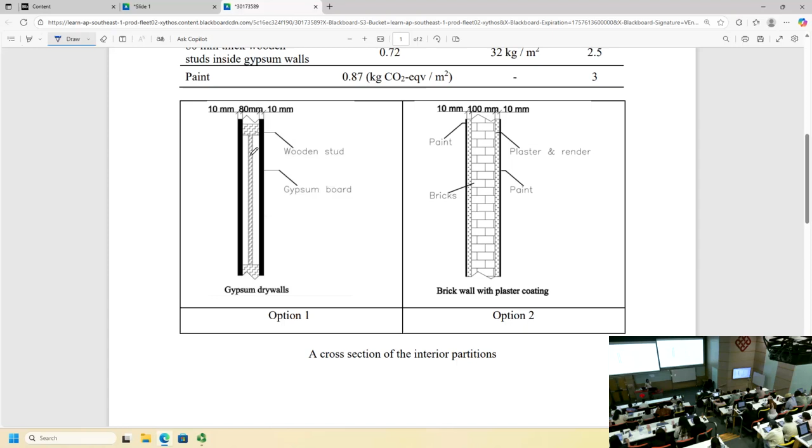Okay, so these are all we have, and we can calculate the carbon. So first of all, let's calculate the embodied carbon of the gypsum drywall. The gypsum drywall consists of the gypsum board and the wooden stud. For the gypsum board, we need to calculate the weight and then multiply by the wastage factor and the emission factor. For the weight, volume multiplied by the density.

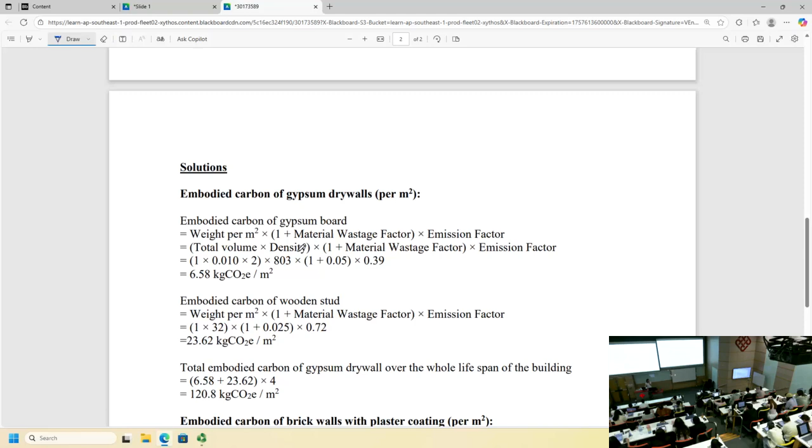So for the gypsum board, the thickness is 10 mm or 0.01 meter. And we need 2 of them. And multiply by, let's say, 1 square meter. So let's say we are calculating a wall area of 1 square meter. If we have the thickness, and we multiply with the wall area, then we have the volume, right? Area multiplied by the thickness, then we have the volume.

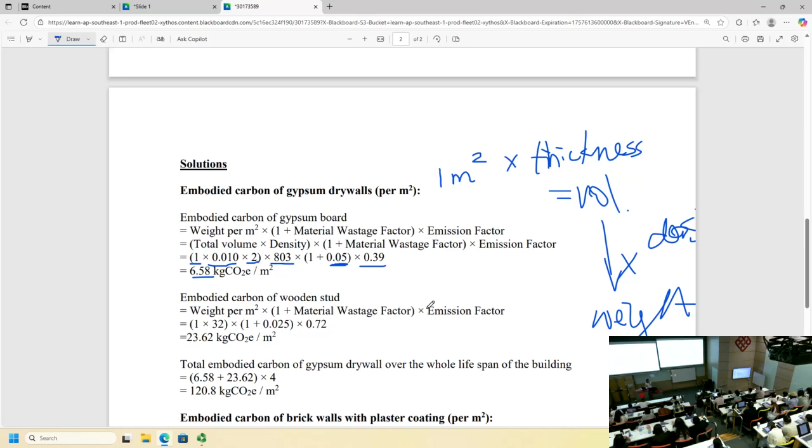Okay, and volume multiplied by the density, then we have the weight. So here area multiplied by the thickness, and we have 2 gypsum boards on the 2 sides. And the density, and we have a certain wastage factor, and finally the emission factor. So we have the amount of carbon emissions, and in between the gypsum boards, we have the wooden stud, the structure.

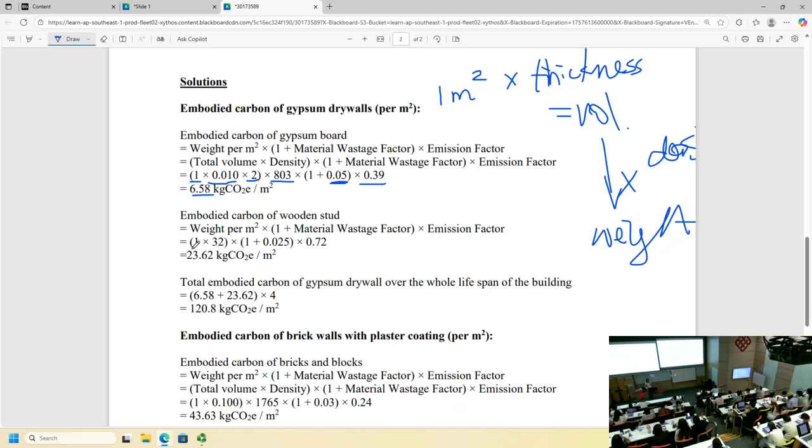And the emission factor is based on weight. Okay, and the density is based on the area. So for every square meter of wall, we need 32 kg of the structure. This time we don't need to calculate the volume because we already have the weight per 1 square meter. And still we need to multiply by the wastage factor, which is given on this side of the table. So the weight multiplied by the wastage factor, the emission factor, and we have the carbon emissions per square meter of the drywall.

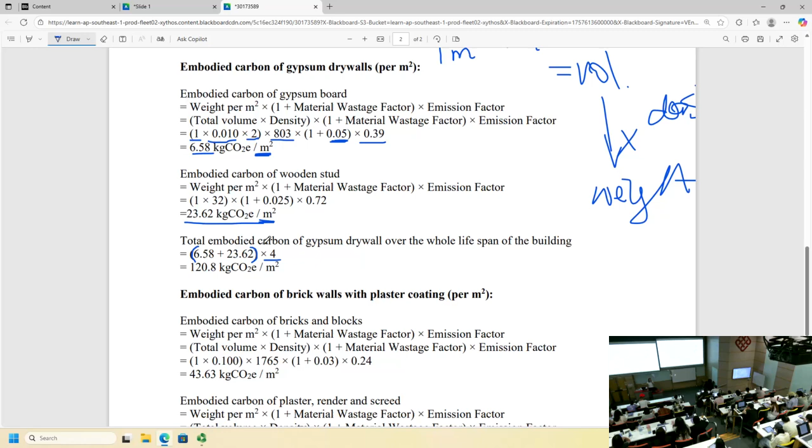And we add them up together for the gypsum board and the structure, and we need to multiply by 4. Why? Because we are calculating the embodied carbon over 40 years, and the lifetime of the gypsum board is only 10 years. So it means that we need to replace the drywall 4 times. So we multiply by 4.

Okay. And next is the embodied carbon of the brick wall with the plaster coating, and once again we are calculating the embodied carbon for every 1 square meter of wall area. So first of all, calculate the brick and blocks. For the brick and blocks, we have the thickness 100 mm, that is 0.1 meter. Thickness multiplied by the area, we have the volume, and the volume multiplied by the density, we have the weight. So area multiplied by thickness, and then multiplied by the density, would be the total weight.

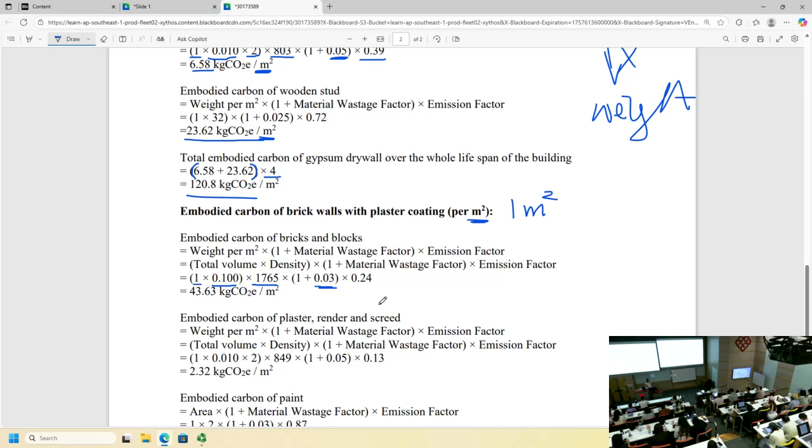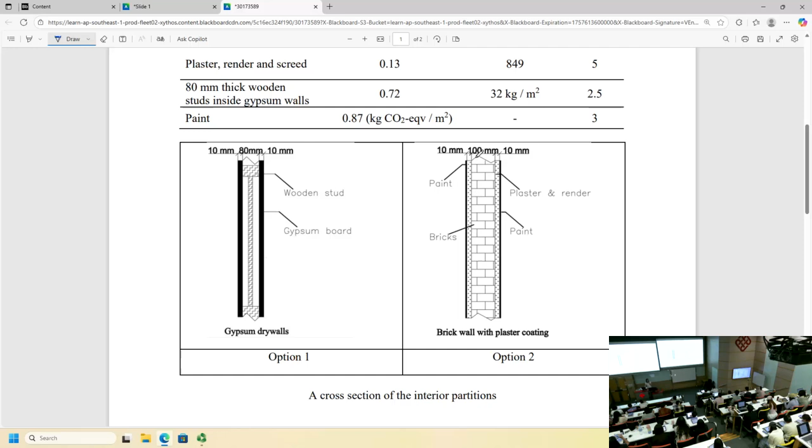And we need to include the wastage factor of 3%, and next multiply by the emission factor, which is 0.24 per kg. So we have the carbon emissions for every 1 square meter of wall area. And next would be the plaster and the render, and we have 2 layers on the 2 sides of the wall. The thickness is 10 mm or 0.01 meter, and we have 2 of them, so multiply by 2 and multiply by the area, so we have the total volume, and the total volume multiplied by the density, we have the total weight, so just something similar.

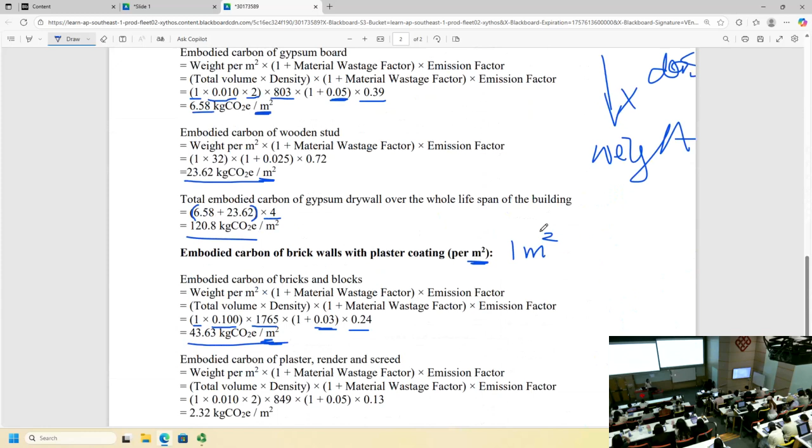Okay, so the thickness multiplied by 2, and the area, we have the total volume, and multiply by the density, the wastage factor, and the emission factor. So we have the carbon emissions due to the plaster, render, and screed for every square meter of wall area.

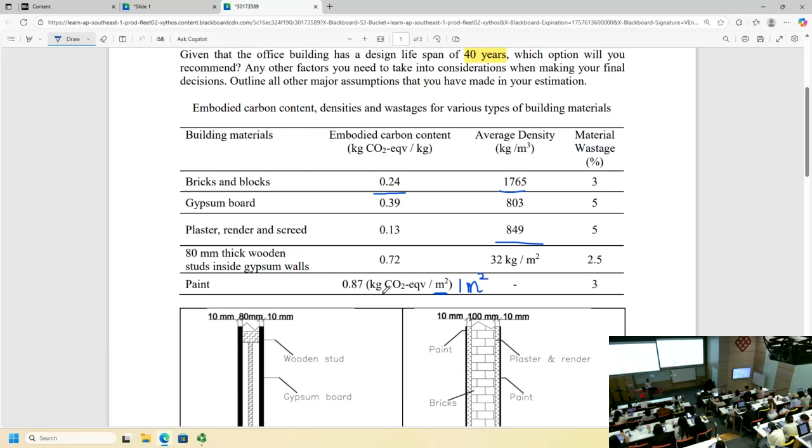And lastly would be the paint. For the paint, the emission factor is kg carbon dioxide equivalent per square meter. So for every 1 square meter of area, this would be the emissions. And we need to apply the paint on the 2 sides of the walls. So we multiply by 2, and we apply the wastage factor once again, and the emission factor, and we have the embodied carbon for the paint for every 1 square meter of the wall.

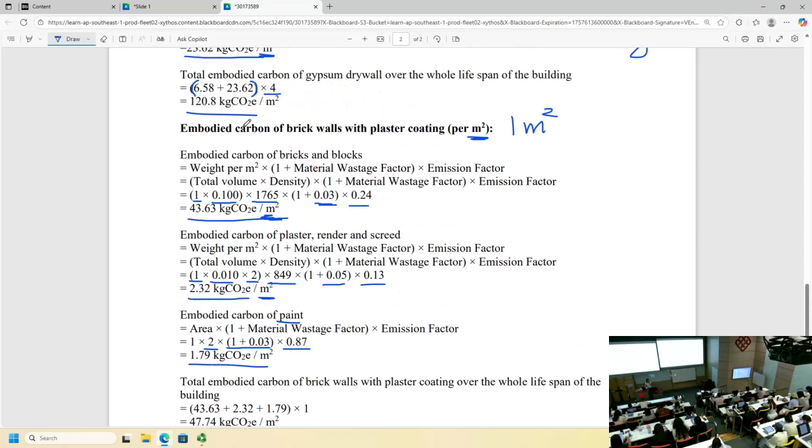Okay, so for the total embodied carbon of brick walls with plaster coating, we add up these 3, and we only need to multiply by 1 because the lifetime of the brick wall is longer than 40 years, and it means that we don't need to do any renovation, maintenance, or replacement for the brick wall. So this is the total. So comparing these two, 40 something and 100 something, the brick wall will have lower embodied carbon. So probably we will recommend option 2.

Okay, so that's the calculation of the embodied carbon. Not difficult at all, very straightforward. You only need to calculate the volume and then the weight and multiply by the wastage factor and the emission factor, and you have the embodied carbon. Okay, so I think I will just stop here. And next week, we will study the operating carbon and also the transport carbon.